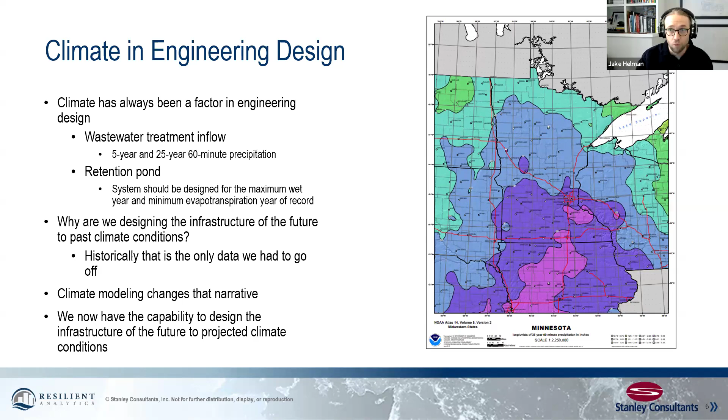So not only can we address design, but we can also address the impacts. We've modeled baseline conditions, we've looked at the 100-year peak discharge in a channel, but now we can begin to model projected conditions. We can look at acute risk, which is damage from a catastrophic event that might be from a hurricane or a wildfire. We can look at operational risk, which is more chronic to infrastructure and operations. Shortened pump lifespan would be a good example.

And ultimately, through an approach that we'll talk about later, these impacts can be modeled and quantified to inform decision-making, because that's what it's all about. It's about quantifying these impacts, finding the magnitude of that, and then seeing if adaptation can help add resiliency for our communities and the infrastructure it serves.

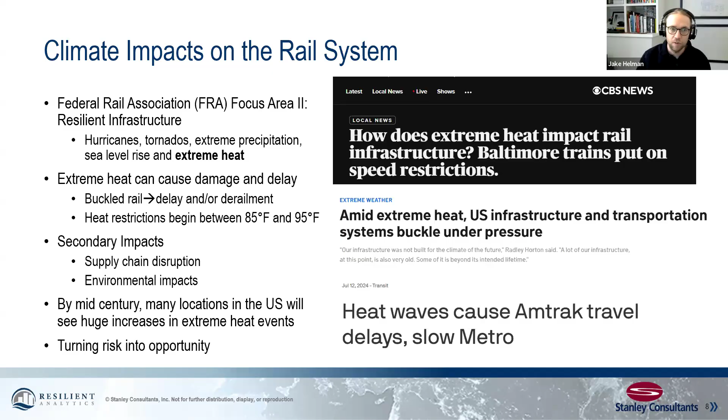Specifically for the rail system, I think the FRA specifically calls out resilient infrastructure, and they talk about hurricanes, tornadoes, extreme precipitation, and extreme heat specifically. Extreme heat is probably the most well-known impact on the rail system. Every summer, there are news articles talking about delays in Amtrak or freight or anything, whether it be a big heat wave in the Northeast or the West Coast, whatever it might be. And that is ultimately because extreme heat can cause delay and damage, buckled rail, derailment, and heat restrictions get put into place when the temperatures get warm enough, which leads to that delay.

And that leads to secondary impacts. That could be supply chain disruption, which goes to construction or operational materials - treatment chemicals, steel, whatever it might be. And there are also environmental impacts. Air quality from idling, potential derailment impacts could be a big one as well.

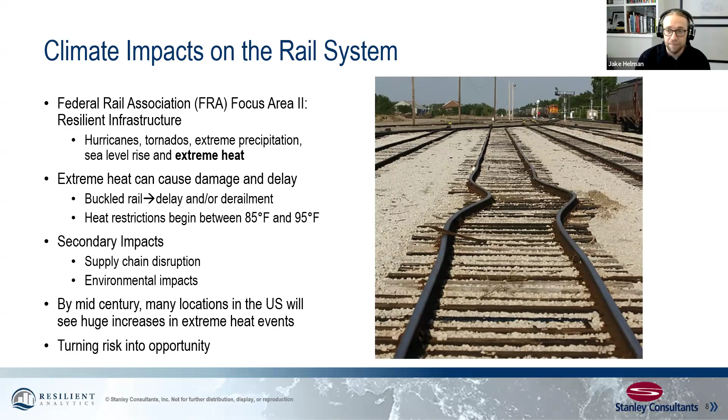This is the change in days, and that ranges from about 20 days to as high as 80 days annually, which is a huge difference. So we'll see more of these delays, we could see more of these damages, but ultimately we can turn this risk into an opportunity.

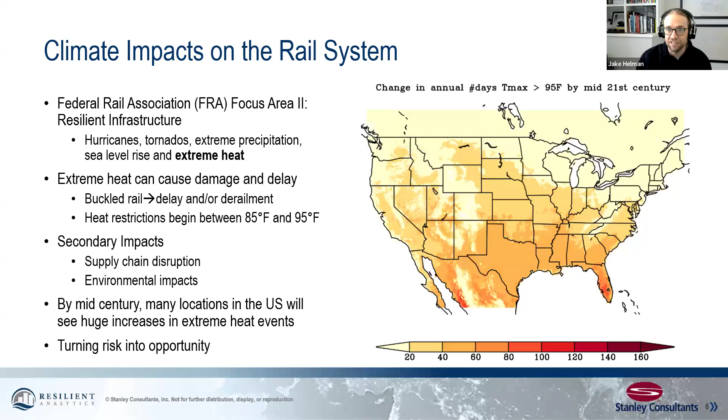The market has started to see that owners, operators, and builders are taking notice and want climate change to be addressed. It's not an abstract concept anymore. It's appearing in RFPs. And ultimately, as engineers, we need to be prepared for this, and it needs to be done correctly. So engineering companies need to act as a trusted partner with owners and ultimately decide how to understand these risks and implement this as a new risk metric.

So how can we address climate impacts in engineering? We have a data-driven approach that we take to resilience. This is a framework that we utilize in order to make actionable results and informed decision-making. You can see on the left-hand side a very quick diagram of how we do this.

We'll go into each one of these steps in more detail, but it's collecting and processing, and then the key being connecting the data. When I say connecting the data, I mean we have all of these data streams and we need to connect it to infrastructure. We need to create stressor response functions, estimate damage and cost in some way, and then we produce that model, interpret that data, and apply it to create actionable results. So the key to the data-driven approach is to gather a number of different data types and connect them to infrastructure, which is easier said than done.

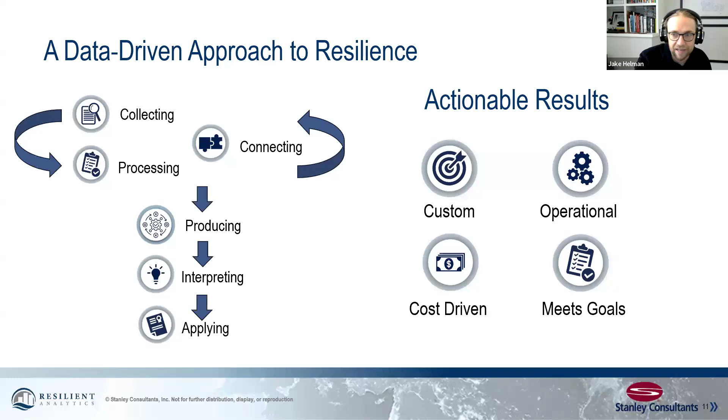So let's take a look at data collection and data types. These are the 7 main ones we work with. They vary in sources, in format, in size. They're updated constantly. In today's world, data is constantly being produced and it can constantly be utilized.

The first one, and probably most important, is climate data. Climate data is starting to be integrated into engineering and engineering design. Many of you are aware that the new NOAA Atlas 15 actually includes climate projections, and that's just one example. Climate data can come from a number of different sources, whether public or private, and we'll get into some specific sources we use later in the presentation.

Spatial data is another data source that we use. Climate data is gridded, which is not incredibly useful for interpreting the data. So going from a gridded resolution to county, city, or state boundaries, this is a geospatial process. Spatial data is important.

Physical data would be tree canopy, impervious surfaces, or floodplains - things that would impact the sensitivity to a certain climate impact. Infrastructure data is pretty straightforward. In this example, that would be the rail geometry, the length of the rail, and other infrastructure attributes such as rail traffic and things like that.

The fifth one is methodological data. This is that connecting piece - stressor response functions, really that connection between the data sources and the infrastructure.

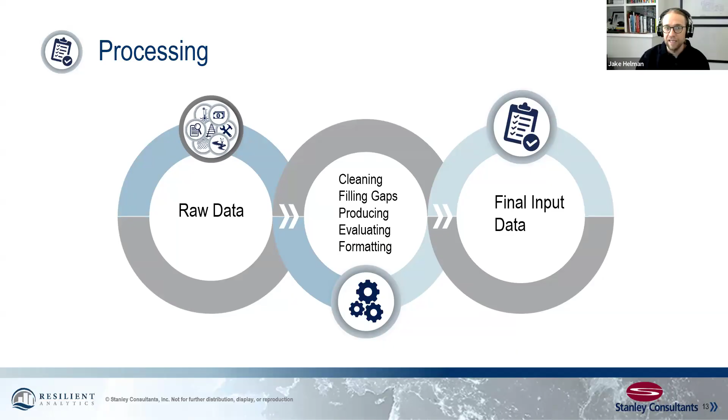Filling in gaps from whether that be rail or road data sets or whatever it might be, where there could be at a district level differences in how they input the data, and ultimately getting into the final format so we can process that data and connect it to the infrastructure.

As I mentioned, the connecting piece is probably the most important part. This is connecting all of those data streams, establishing the analytical structure, establishing the stressor response functions, which are the response of the infrastructure to the climate in a certain area. It is going through the model boundaries and assumptions - a lot of assumptions need to be made on these.

Depending on how generalized or specific the model is, we need to ultimately establish the data that needs to be produced. Derived climate variables is a good example.

Climate data, in its rawest form, is maximum temperature, minimum temperature, precipitation, and some other variables, which isn't so helpful. We need more specific variables, such as the depth of the 100-year, 24-hour rainfall event, things like that. Then the cost scenarios, which would be reactive or proactive, ones that include adaptation strategies or not. And then finally establishing the final metrics, which drives the narrative for interpretation.

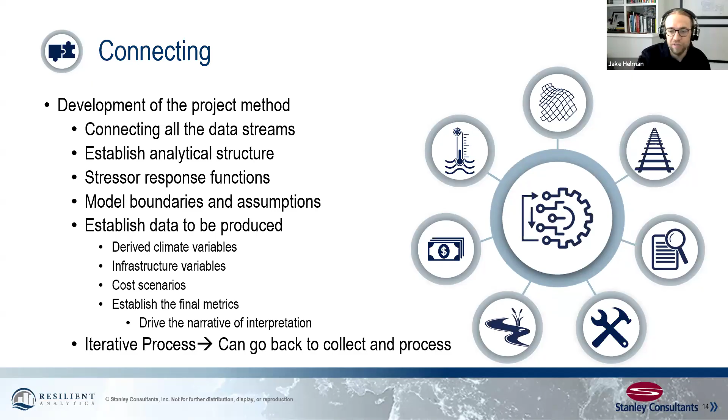This is an iterative process, as you saw from that first one. You can go back and collect and process data and connect it to infrastructure until you have what you need ultimately to start producing this model.

We model in a number of different environments: MATLAB, Python, ArcPro, and these can be output and integrated into more traditional engineering softwares, the hydraulic modeling system being one. This is an iterative process and includes a lot of sensitivity and validation. Because we're working with so much data, those two things are incredibly important.

And then interpreting the data. So establishing categories: are we looking to see how the impacts might change over time? Are we seeing how it might impact across asset types? Spatially, perhaps certain districts or states, or locally, certain assets specifically, and synthesizing these results to create succinct data.

We're creating way too much data to interpret it all, so we have to create a summary to establish key trends, patterns, and insight to make it actionable and apply it to deliverables such as vulnerability assessments, resiliency improvement plans.

We've done engineering resilience assessments, creating technical reports, and all of these things include asset vulnerability and risk. We can include project prioritization, which can be woven into capital improvement plans or long-range transportation plans. We can look to changes in design standards, and these deliverables come in a ton of different formats depending on the client, whether it be a report, GIS, interactive tool, and it has to be consistent with other initiatives.

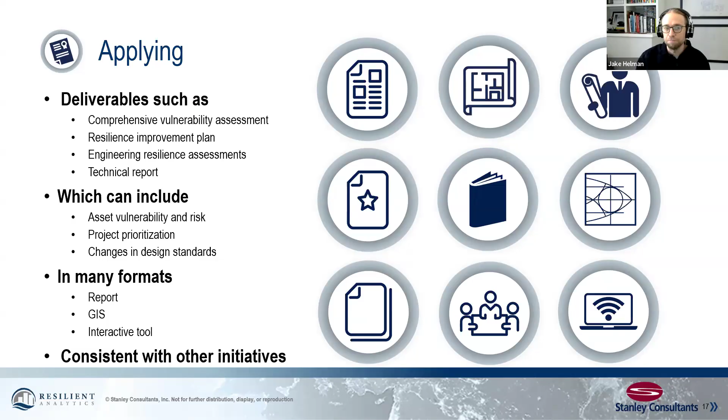This is really important: communicating with the client and the owner what else they're doing as far as capital improvement plans or within resilience planning, to make sure this isn't put on a shelf, to make sure these results are actionable. That means they are custom, put in their terms, speaking their language, and can be included in their operations. They are cost-driven, meaning we have quantified impacts and quantified adaptation strategies. Ultimately, it gives them all the tools they need to make an informed and familiar decision.

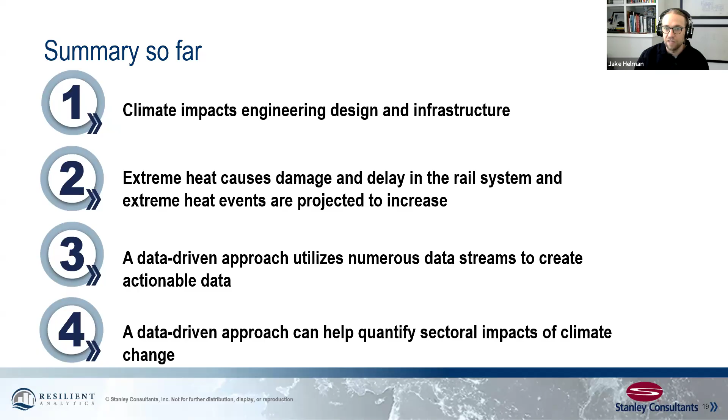So a quick summary so far, before we pause for questions. Climate impacts engineering, design, and infrastructure. Heat can cause damage and delay in the rail system, and heat events are projected to increase. A data-driven approach utilizes all of these data streams to create actionable data by connecting the data to infrastructure. And finally, a data-driven approach can help quantify sectoral impacts of climate change, which we'll talk about later - that specific example is going to be rail.

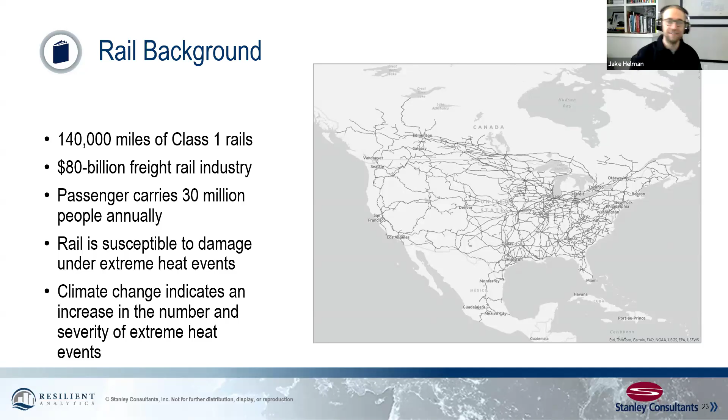Specifically for rail, which is a huge industry, there are 140,000 miles of Class 1 rail. It is an $80 billion freight rail industry, and passenger rail carries 30 million people annually. It's not a surprise this was included in this analysis, and it's not surprising given that rail is susceptible to damage under extreme heat events. As we mentioned, climate change indicates an increase in the number of these extreme heat events, so once we get that impact and put it side by side with an $80 billion industry, we can start to see some pretty big impacts.

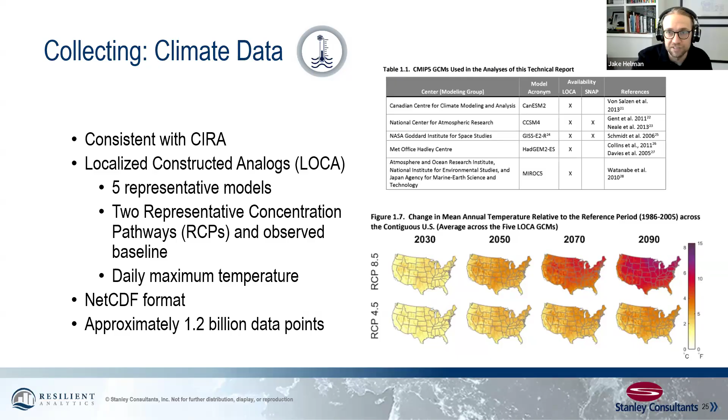For this analysis for rail, we used daily maximum temperature because we were only going to quantify extreme heat, and that was given to us in NetCDF format. Although this data set only included 5 models for 2 RCPs, oftentimes we run 32 models for 2—it's still 1.2 billion data points. It's still a huge data exercise to get this from daily maximum temperature to ultimately the metrics that we needed. So the next data source is spatial data.

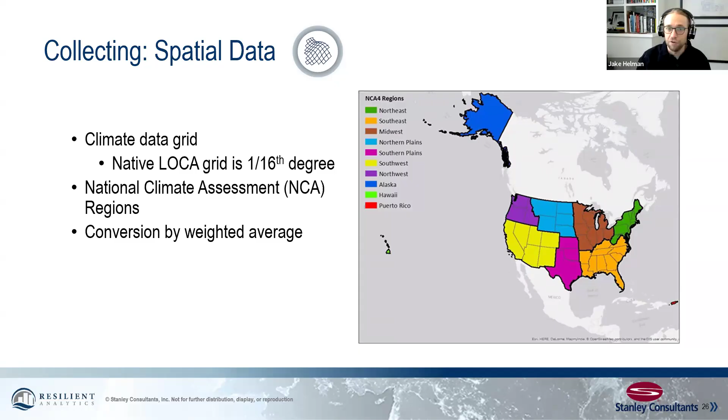The native resolution of the climate data grid is 1/16 of a degree, about 3 miles by 3 miles. But we needed to get that into something easily interpreted and consistent with what the EPA wanted, which were national climate assessment regions, NCA regions, and that can be converted by a weighted average, summed across. So there's some geospatial processing involved.

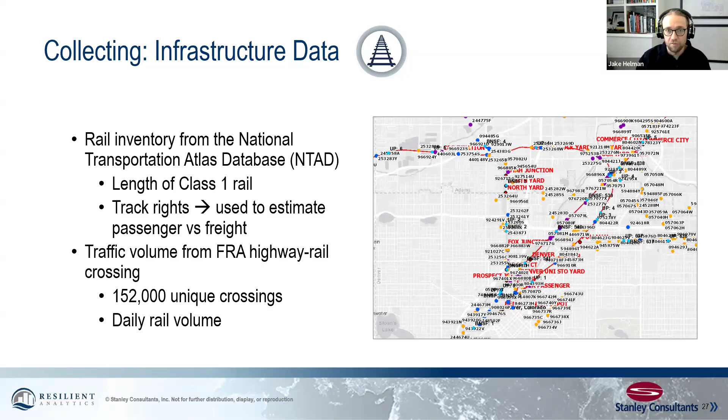The infrastructure data in this case is the GIS files that looked at the length and geometry of the Class 1 rail. It included the track rights, used to estimate passenger versus freight, and the volume, which was from the federal highway rail crossing data set. There were 152,000 unique crossings with daily rail volumes. You can see the image on the right speaks to the number of unique crossings, this one in Denver specifically.

So we have ambient temperature, but we need to get to rail temperature. We need to calculate the stress-free temperature of the rail, which is the design neutral temperature—the temperature at which the rail has no internal stresses, the temperature at which it's laid in the summertime. Then there's the expected buckling probability, which is pretty complex, and even delay.

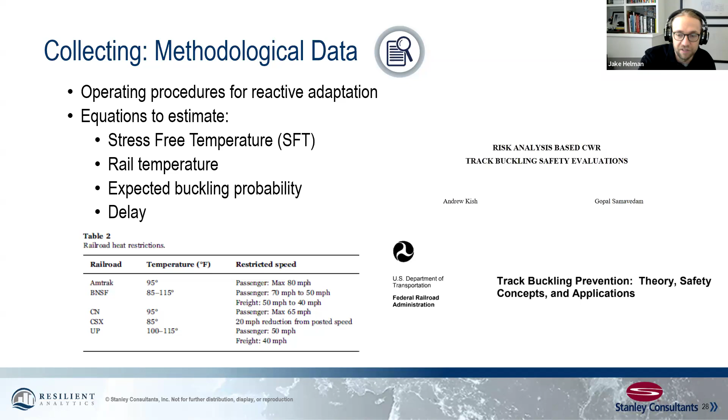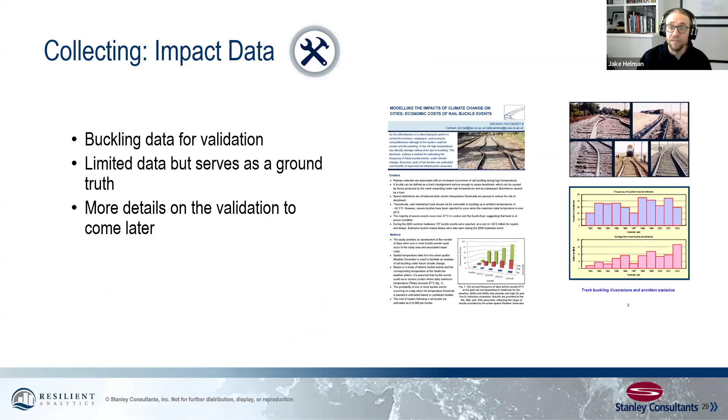The impact data specifically looked at buckling data for validation. We were trying to calculate the expected number of buckles, and we needed to ground truth this somehow. So we pulled data—we'll talk about it a little later—from the UK, since there wasn't specific data on buckling events from heat in the US, so we had to look elsewhere as that ground truth.

Cost data involved a number of different cost scenarios, coming from RS Means and guidance from US DOT as far as delay goes. We had to split business versus pleasure, bulk versus intermodal unit cost—two types of freight. Bulk would be materials, intermodal would be shipping containers—and then there's the cost to the crew, the cost to the public, and the cost to repair.

There's a ton of different assumptions we had to make, guided by US DOT—like 6% of total trips considered business trips, for example, and all the ratios in between. This was based on a methodology by Lovett et al. 2015, which looked at estimates of cost of delay for freight trains for the railroad company and the public.

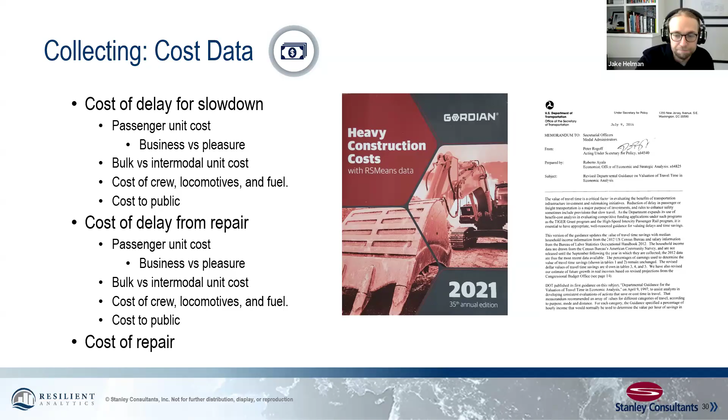For processing this data—cleaning it—we had to include only Class 1, only operational track, and eliminate all rail outside the US. For filling gaps, we had to fill in missing volumes if a grid didn't have one, by looking at surrounding grids. We also had to produce other data, like the passenger versus freight ratio, since traffic wasn't split into passenger versus freight at each node, so we had to estimate that by looking at track rights.

Evaluating that data, doing a sanity check: what are the traffic volumes in rural versus urban, what climate metrics are we using across, are we seeing differences in the baseline where we'd expect to, things like that. And then finally, formatting—putting them into grid-level tables for reading. This analysis was ultimately done at a grid level.

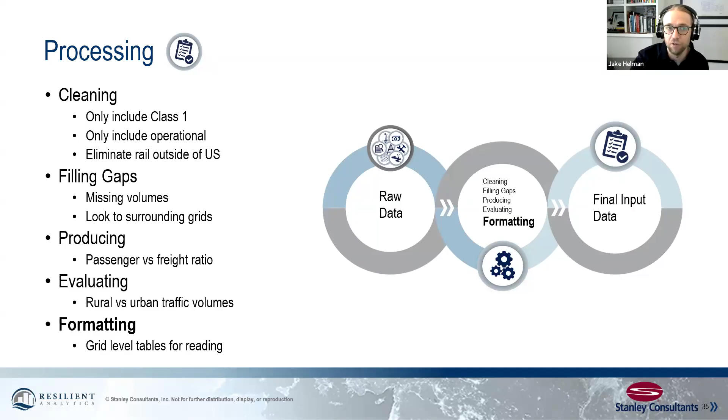So before the second pause for questions, a quick summary. The rail analysis was designed to estimate physical and economic damages of climate change. Rail is just one of many sectors being looked at. The rail system is a massive industry, and the climate impacts were suspected to be pretty large, so this analysis was meant to quantify that. Finally, a ton of data sources had to be collected and processed before we even began this analysis.

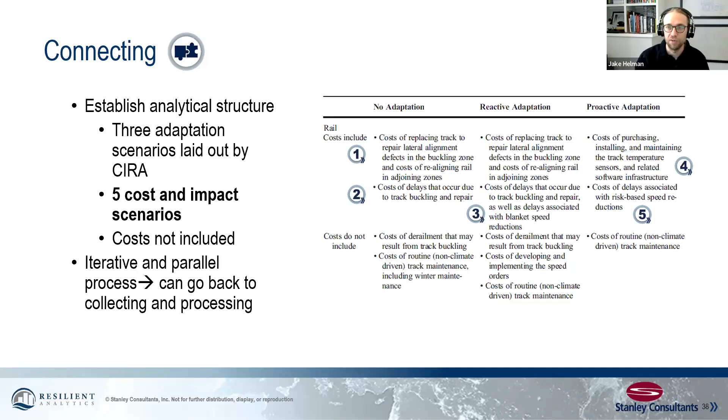As I mentioned before, this can be an iterative and parallel process to the first two: collecting and processing that data.

Second part of connecting, we'll get into just a few of these stressor response functions. So expected buckling events, this is the crux of how we estimated the number of buckling events. As temperature increases, there's an exponential curve, which was developed by the US DOT through some of that research. The higher the temperature, the higher the probability of buckling and the more expected buckling to occur.

It is also a function of the length of the trains, the number of trains, and the frequency of the temperature itself. So for reactive delay, this would be the blanket speed order. Delay was estimated using the reduced speed versus what the base speed would be, the length of the rail, and the hours of the speed orders.

And then for proactive delay, this was a risk-based approach where instead of a blanket speed order, as you saw from that table earlier, where it went from 80 to 50 just over a certain temperature, this is thinking more to a localized level of what are the specific track conditions, because we have this sensor network, and what is the speed at which the allowable temperature reduces this risk enough, based on this equation on the left. So it is a more informed, risk-based decision. Ultimately, the delay or the restriction might be less, or it might not be enacted, because we know that the rail temperature is not vulnerable ultimately.

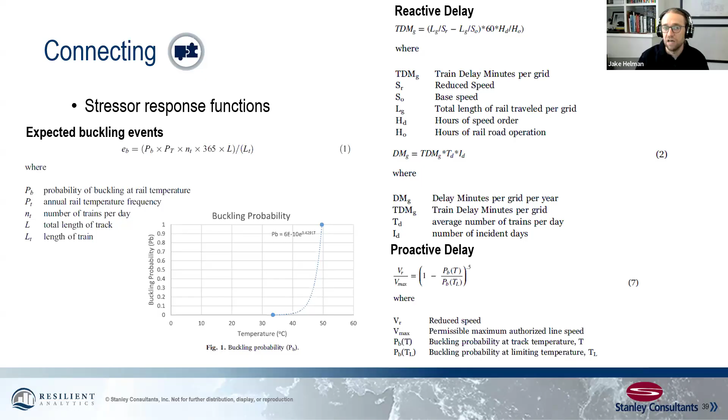So also connecting, we established the boundaries. We looked at 20-year eras in 2030, 2050, 2070, and 2090. All of this was consistent with CIRA. We scaled up to a 0.5 degree resolution, which was chosen to better represent ultimately the rail stock. And the baseline time period was from 1950 to 2005. That is a limitation of the climate data itself.

So we looked at an undiscounted cost and a 3% discount rate consistent with CIRA. We also adjusted costs based on population and GDP growth, which you can see on the right-hand side. That was another initiative of CIRA.

And as I mentioned, we did not quantify derailment, but there were a ton of other highly specific assumptions, like what is the hours of the delay from the speed order, what is the hours that the train is in service, what is the freight speed restriction for the blanket speed order, and what is the passenger speed restriction. That was based off of that table we saw earlier.

So finally, the data to be produced. We had derived climate variables that we needed. We needed to turn daily maximum temperature into restriction events. We needed to know when there would be a blanket speed order in order to estimate that delay. We needed to know the average max summertime temperature, which feeds into calculating the stress-free temperature. And we needed to know the minimum allowable and maximum temperature for expected buckling, and ultimately the probability of temperature for expected buckling. These are calculations over those 1.2 billion data points.

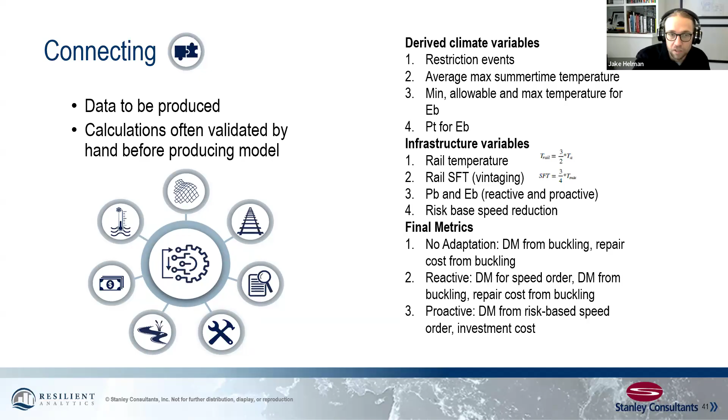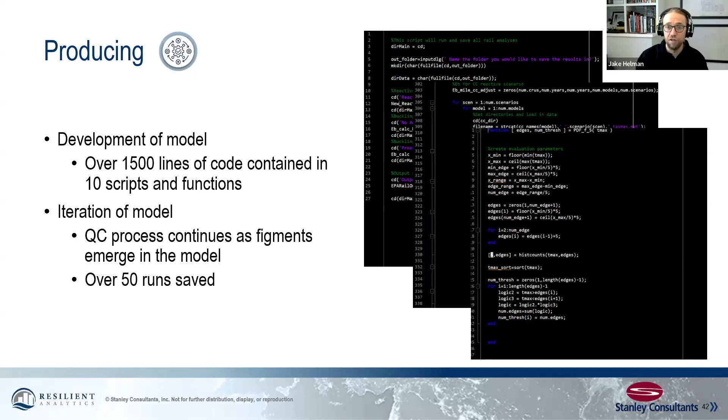So all of that connecting has to now be produced. In this case, the model was 1,500 lines of code, written in MATLAB, with 10 scripts and functions. And there's a ton of iteration. We were taking a ton of different data sources, so QC was imperative. Over 50 runs were saved, looking at various items and testing the sensitivity of some of the broad assumptions, such as the time of slow order, the train speed, and the restrict temperature.

Sensitivity in these types of generalized models is huge. You're looking to see, okay, if I change the train speed baseline from 80 to 70, what might happen? You'd expect minimal changes, or changes that might be linearly correlated. But if you see something much larger, that means we have some other issues within the model, so we go in and we iterate and we find, and we go from there.

And then finally, the validation. This would be comparing the output to something we've seen and something that we can ground truth against. In this case, we used buckling events per mile. So we estimated buckling events per mile for the reactive approach, which is current operating procedures, and compared it to a source from the UK. Ultimately, that was within 15%, which is pretty good for a generalized model. Obviously there are differences between climate in the UK and here, so we took a representative region to estimate that even more specifically.

And then the second thing was for the no adaptation scenario. If you don't do anything, if no one restricts speeds at all, you do get more buckling events—a lot more buckling events, 70% higher than what we would see—which is just a good sanity check that the model is behaving how we think it is. It is being ground truth, and all of this checks out. And then we can move on to the interpretation.

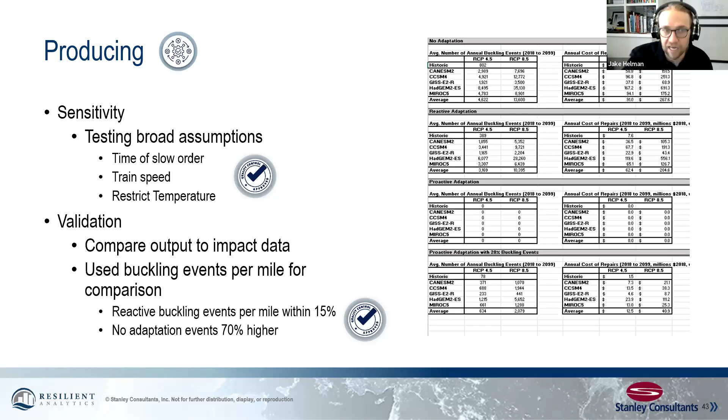But another pause for questions.

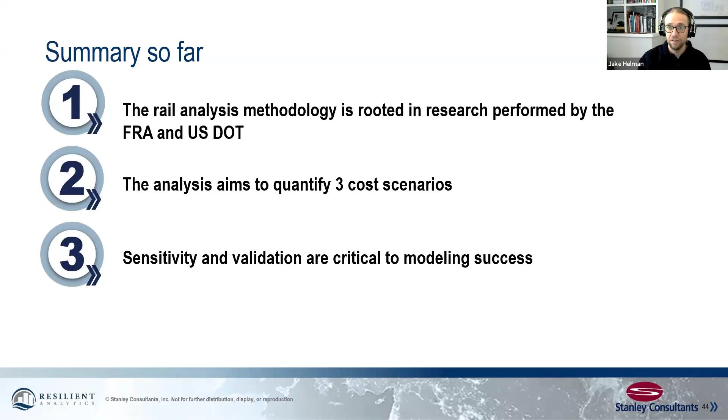Summary so far: the rail analysis is rooted in research from the FRA and the US DOT. The analysis looks to quantify three cost scenarios: no adaptation, reactive, and proactive. And then finally, the sensitivity and validation are critical to this modeling process and to the modeling success ultimately.

Awesome, great. Well, the question that came in here: what are some of the preventative industry measures that could be working on this? Are there changes in rail tie connectors, alloy composition? Yeah, and maybe that's leading into your next section, but that seemed like the right question to ask at this point. It's a great question.

I will talk about a number of different adaptation strategies that are currently being implemented. When we started this study, it was very limited, and this new sensor research that we proposed was also new, and it's now starting to be integrated. So we'll go through a number of those different adaptation strategies, but it's important to call out, we only modeled one proactive scenario. By no means do we think the entire rail network should implement a sensor network across the United States—we understand that's not feasible. The point is to provide a justification for proactive adaptation, just to quantify how much could I save if I got collaboration between all of these rail owners and operators. At a local level, maybe the adaptation strategy is a little bit different, but from a modeling, higher-level policy perspective, which is what this is, we just looked at one.

So, yeah, great, thanks. Yeah. Okay.

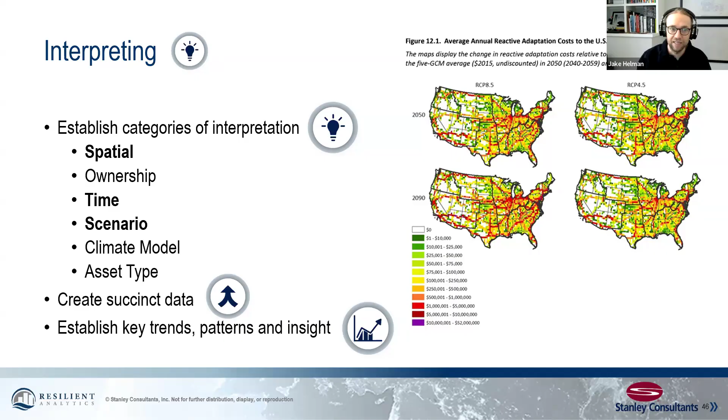So, last few items here. Interpreting this is incredibly important. Now we have produced all of this data, and now we have to interpret it. So spatially, what does it look like? You can see the maps on the right-hand side—where are the hotspots? The Midwest, not surprisingly, where we see a lot of rail traffic and a lot of rail lines, looks to be an area that experiences some of the highest costs. You can see over time, from that top row 2050 to 2090, a slight darkening of these maps, meaning the costs are higher, which would be expected. And by scenario, under the higher emission scenario, where the temperatures are higher, we see higher costs. So establishing all of this criteria, creating succinct data, and then looking at the key trends—this is a figure showing a representation of how those costs increase over time.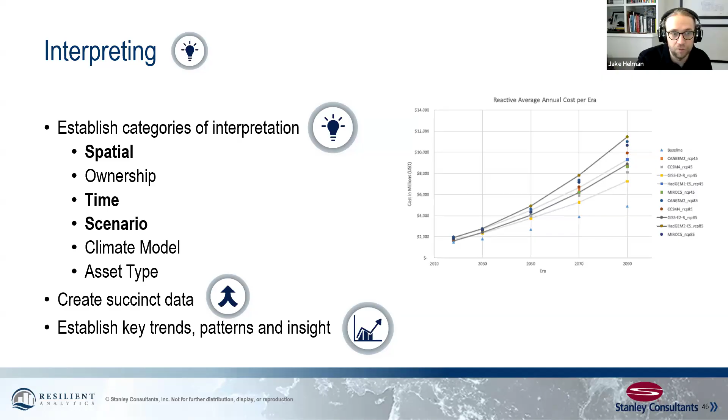And these are pretty significant increases. You can see that baseline estimate where we're only looking at a few billion dollars annually, and then that scales up to a wider range, as much as 10, ranging down to about 3 billion. So, key insights.

There's a large increase in costs under all scenarios. The no adaptation scenario shows a huge increase in buckling events, delay, and costs. The reactive adaptation scenario shows a large increase in speed orders, not surprisingly, because there'll be more restriction events, but it does help offset the buckling events, meaning current operating procedures are certainly helping, which isn't surprising because we'd expect them to be effective. But compared to proactive adaptation, risk-based speed orders can dramatically reduce delay cost by making more informed decisions using that sensor network.

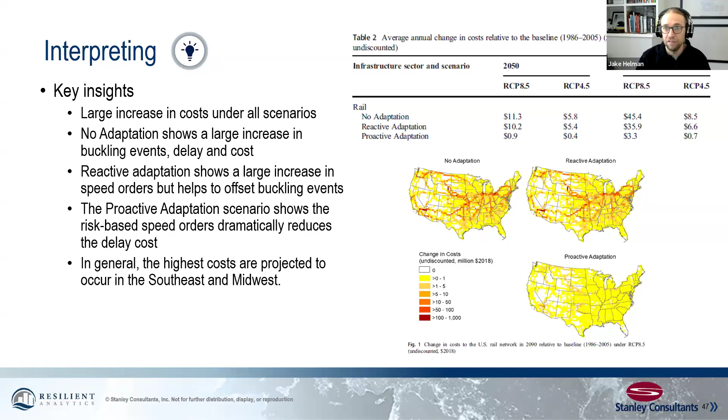In general, the highest costs were in the Southeast or the Midwest, but you can see the proactive adaptation scenario can save billions of dollars annually, and that's over the long run. There's an initial investment cost that would set you back a certain amount, but by 2050, we're already seeing a pretty big return on investment.

And then interpreting across sectors, as I mentioned before, this is just one of 22 different sectors. Rail, compared to others nationally, was the 9th highest from an economic damage standpoint, which makes sense, it's an $80 billion industry. It was also the fifth highest reduction when comparing the two emission scenarios, meaning under the higher emission scenario it's 37% higher, which is a big difference.

That ties to a policy level insight: if we reduce greenhouse gases, if we aim to cut more, we could save on some of these impacts. Looking more regionally, we see that in the northern plains, shown in lighter blue, rail is actually the third largest economic impact compared to other sectors, and fifth in the Midwest. So in certain regions it had a much larger impact relative to other sectors, which is another important finding.

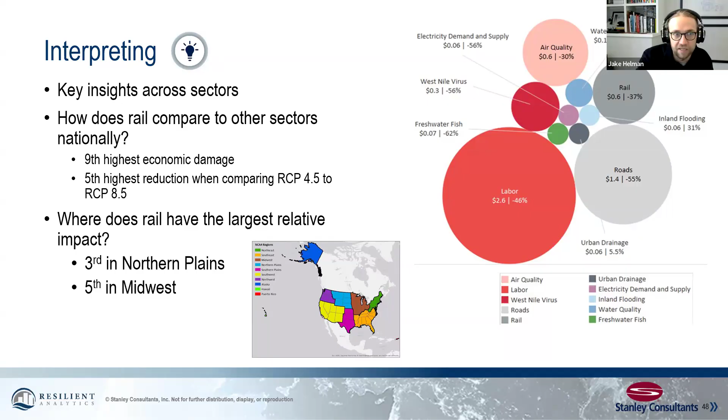For the application, or applying all of this from a data-driven approach, we ended up creating a number of different deliverables. One was the actual CIRA report and writing those chapters. We had two publications as well, one in Transport Policy and one in Climatic Change. And finally, there's a framework for evaluating damages and impacts called FREDI, which is a framework for the EPA to allow local users to pull some of this data to estimate these sectoral costs at a different level.

So this enables this data to be utilized by others and can be used for local adaptation plans, climate action plans, resiliency improvement plans, things like that. Data structures were provided to them, along with technical reports, including vulnerability and risk analysis, benefit-cost analysis, and ultimately some adaptation policy.

So taking a step back, what does this mean? What are the high-level takeaways? One, not surprisingly, climate change will have a big impact on current rail operations. We saw costs increasing a lot, and that direct result of delay from extreme heat events, and extreme heat events are increasing. That's $1 billion annually for an $80 billion industry, which is pretty significant.

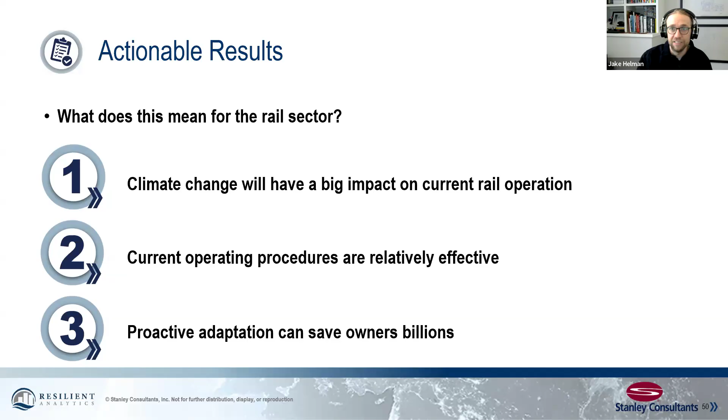We see that current operating procedures are relatively effective in reducing those buckling events, which is a safety feature. So although some of those costs for reactive adaptation are pretty high, we'd be saving potentially in some of those derailments, costs which weren't quantified. And then finally, probably most importantly, proactive adaptation can save owners billions of dollars, so this is justification to invest.

So, proactive adaptation that we've seen: in its simplest form, you could paint the rails white, and we've seen this done widely in Europe. Painting the rails can lower temperatures 5 to 10 degrees Celsius. It's been done in the US, by the Transportation Authority of Rye, New York. The issue is you have to do this annually or every 2 years, so it can be pretty expensive.

There's other research into passive temperature controls, which you can see in that middle image. This is a device attached to the track to mitigate temperature spikes. It absorbs heat from the rail, and it's been tested and can reduce the maximum temperature by as much as 20 degrees Celsius.

But implementation can be challenging. This was research that was being done by the FRA and the US DOT.

The third one is reinforced foundation. You could put concrete slabs that can contain the higher forces, but it's incredibly expensive, like 4 times as expensive as a standard ballast track. So although it can be effective, that justification can be challenging for an owner given that it is 4 times as much. But we're hoping that results from this show it could still be justifiable given the cost you would inherit otherwise for a rail operator.

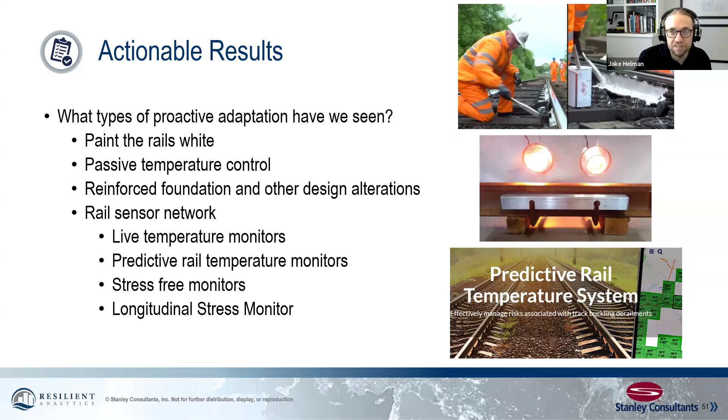So these are just a few of some of the proactive adaptation that we've seen. Amtrak has implemented some of these networks, and there are other rail operators that have done this as well. So, other applications of this model and the data-driven approach as a whole.

The rail model was also applied to work with the Canadian government and the New York State Energy Research and Development Authority to quantify these impacts and justify some adaptation. So that is an application of this model specifically.

But in general, this framework, this data-driven approach can be applied across all sectors and all scales. We looked at a national level study specifically just for rail, but we've also done work with the Arizona DOT, for example, where we looked at one site, SR88, a historic state route that was damaged by a flooding event, and we gave design recommendations for culverts and drainage that was included in a design concept report to improve this road's resilience ultimately. So that is a site level analysis.

So we can go from a site level to a national level, and that's the beauty of this framework and this data-driven approach. You can look at specific engineering design at a specific site, or you can look at a policy level. In between, we've done work with the Water Utility Climate Alliance, where we looked across 5 different water utilities, thinking about worker health and safety, and all of the assets, weaving some adaptation strategies into their long-range plans. And in Hillsborough, we did some adaptation recommendations for a number of assets to be included in their long-range transportation plan. So that's just a few examples.

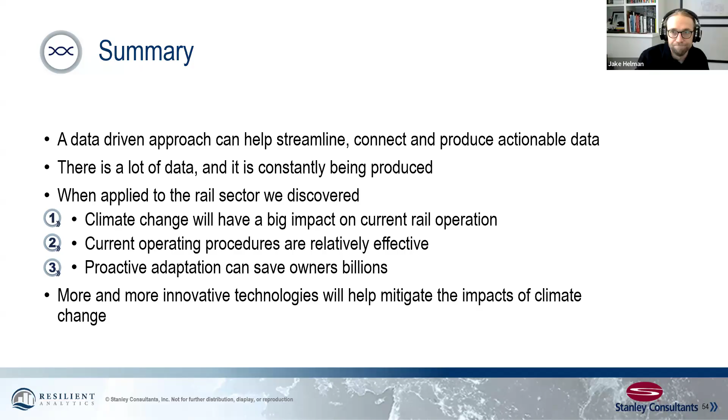That's it. Thank you so much. Looking forward to the questions and discussion.